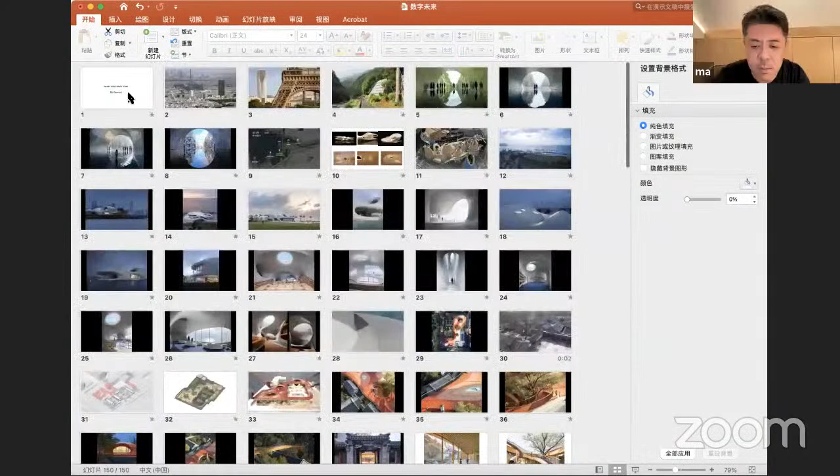The title is Insert New Space-Time. I think we're talking about the future by talking about technology, and the future also starts from imagination, what we believe in the future. So time and space are also quite important. Architecture is physical material and space and technology, but architecture also forms space, atmosphere, and even a strong context to influence how people behave and react to such space. So I think architecture is creating space and time.

So I will start from one very interesting competition we entered a couple years ago. You can recognize this image is the city of Paris, and you see the Eiffel Tower and another dark colored tower to the right. The name of it is Tour Montparnasse, and it's very big, right? It looks very heavy, and the Paris people don't like it. So they held this competition to redesign the facade of this building. And we submitted a proposal like this.

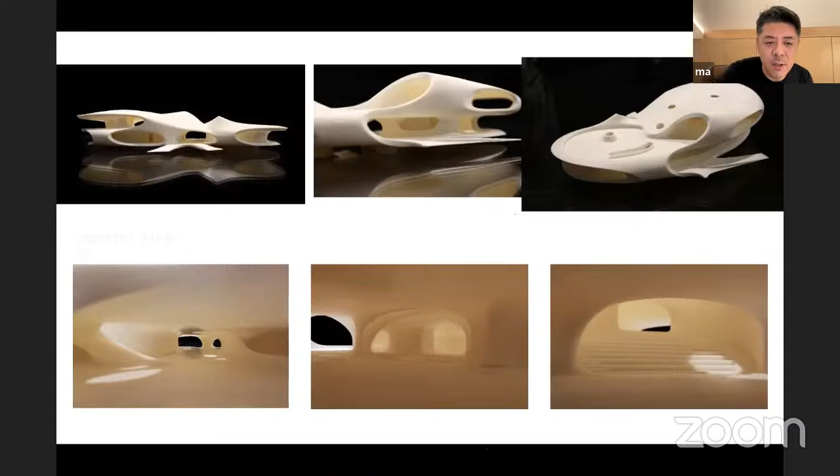So this is the model of the architecture, and we create a space full of holes. We call this the Cloudscape Library - it feels like a floating cloud, but inside you find the negative space. Inside is actually a library, a toilet, a shower, serving the people who are doing sports. That's the model, and that's how we built it.

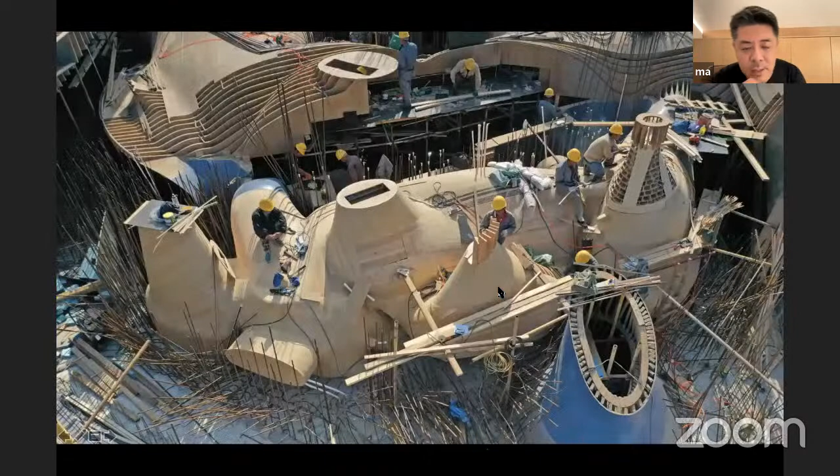Because the model was quite complex, we wanted to make this all continuous, cave-like space out of concrete. So we made this wood mold, which looked like a sculpture already, and then we cast the whole concrete building. And that's when the building was completed - it looked the same as the model, right?

It's all concrete - it has a material, but by using this concrete material, all the space and the walls and the structural elements are all mixed into one complete geometry. You don't see isolated building elements. So why are we doing this? Because the space is more important in this case - you see the holes as entrance, as window, as corridor, and as a light well.

So you enter the space and you want to explore the complexity of it. For example, this is like an entrance space, and you see a coffee shop, you see this second floor terrace. People walk into the building like this - everything is continuous.

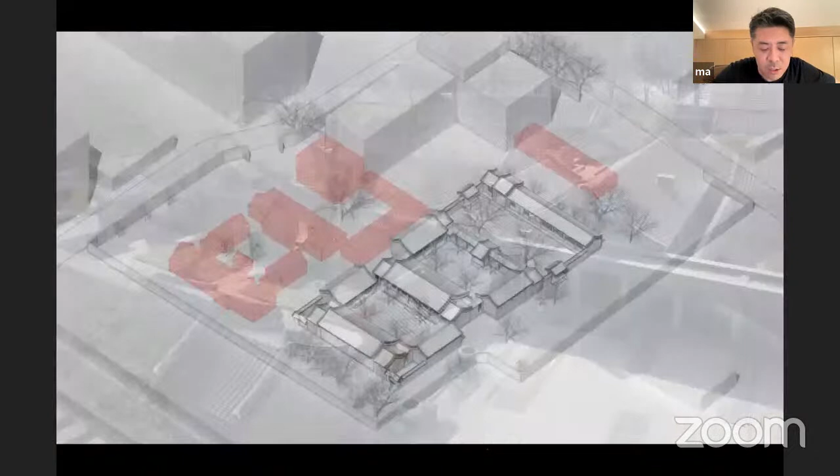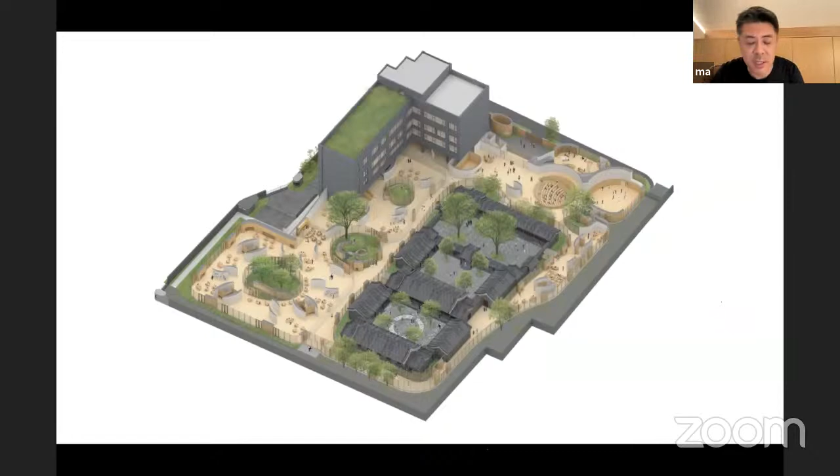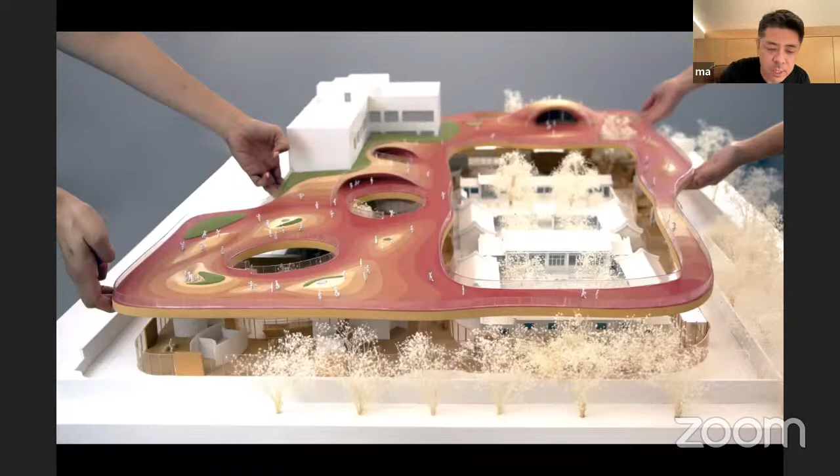So basically all these red buildings we decided to demolish at the beginning because they're fake old buildings. After that, we wanted to use the whole site to make one floor building, including a courtyard inside, including classrooms, because we want to keep the new building very low. So when you're in the old courtyard house, you don't see the new buildings because it's low - they're both single floor. And the roof, of course, is very big, and we want to take the roof as an open space, like for kids to have an outdoor class.

So here is one building completed - we have old and we have new. The new architecture is very different, it has its own character, nothing similar to the old building. The color is different, the structure and the shape - they look a little bit contrasting.

So when you are on the red roof looking at the old building, it feels like you're standing on Mars looking at the Earth. It's a little bit because the courtyard house, the old traditional building, is so familiar - everyone's familiar with it. When you see that, you imagine a special period of time, and the architecture reflects that time. But when you're standing on the roof like this, you feel this is new - you don't know where it comes from.

And then we have a courtyard, we have a room, classrooms like this. That's why we're doing the courtyard - of course we have trees we need to preserve, but also we need a courtyard to bring natural light and wind, the ventilation, to our building. So later I found this typology of architecture is quite consistent with the old traditional building - although it's all new, it's all about internal space and nature.

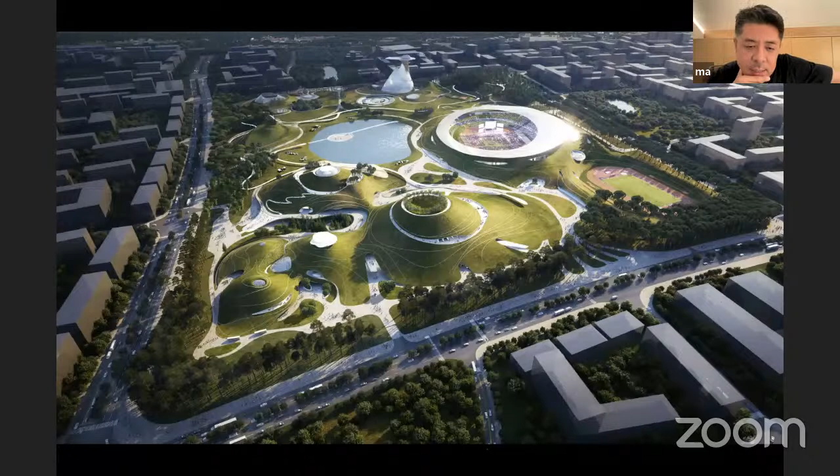And this is another project. It's bigger, a little bit like a park, but it's actually several large-scale stadiums. Normally in each city they build stadiums and swimming pools, all this public sports facility. But in this case we covered all this building into green mountains, and those green mountains look like volcanoes in those renderings. This building is under construction right now, and one of them is already completed.

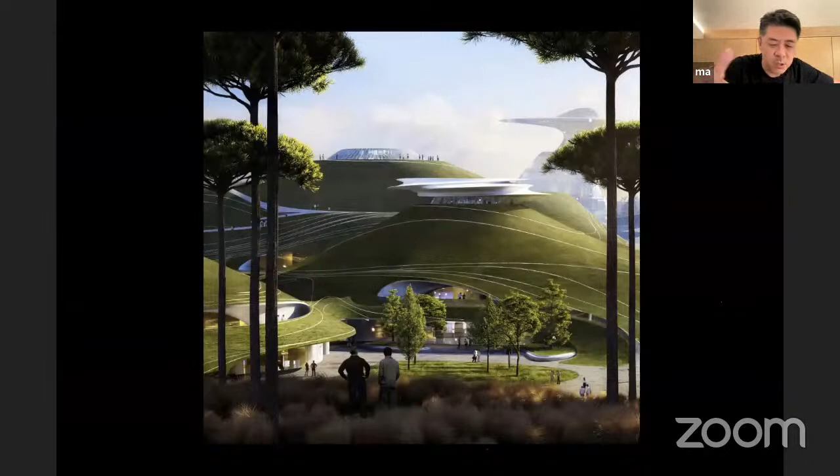So you see, we take all this building as landscape elements, and people can actually walk on the facade, and they can climb all this building. They can reach the rooftop of the volcanoes. So the architecture as a material disappeared. Instead, you will have this land art public park in the city, and everyone can enter and enjoy it.

And this big stadium is disappearing as well. Why are we doing this? Because we thought all these big buildings are showing the muscle in all the cities, because sports normally we understand as a competition, and everything actually in the city is also about competition. The buildings, high rise, people fighting for all this, everything.

So we need a space to relax and feel that people can enjoy the nature and maybe observe the sky or something, a flower or stone. So I think nature is more open to everyone.

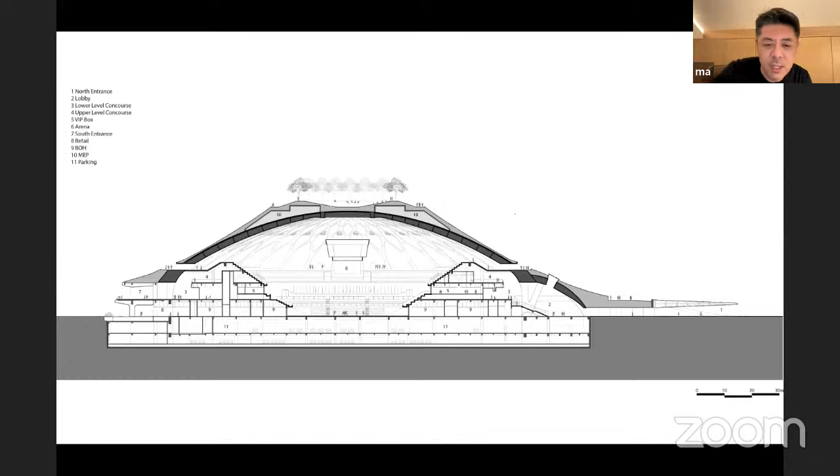But inside the mountain, it has to be a building, because that's the whole project about. And so they see this, we have to build like this. So inside we have rooms and seatings and venues, and this is a sports venue for basketball, but it's a very large span structure. But on the top of it, you have to allow people to access, and also we need to put trees on the mountains, so it's quite challenging for such a structure.

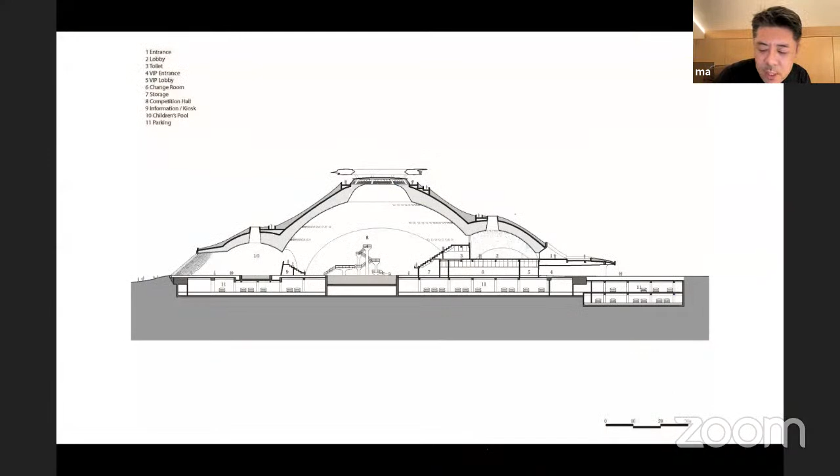This is another mountain, inside is a swimming pool, and we also have a different space and structure system, so that you can have a different program in those mountains. And then you need ventilation, you need natural light as well, so it's a building as a space. But outside, we build a building first, and then we build a landscape.

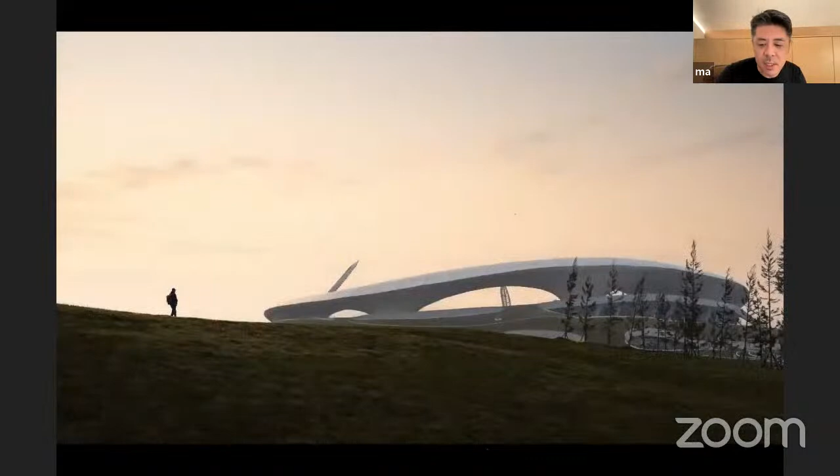This construction site, and this is a stadium already completed. And you see that all this landscape actually becomes part of the facade of the building. Underneath is a program, is a road, is all the functions, but people can freely walk everywhere. They can enter the stadium from all directions. Actually it's a little bit hard to manage a building like this, but you can really find the freedom in such a space.

And that's a parking structure also underneath the building, and it's all the landscaping, right? So it's nature, it's artificial nature landscape, but it's also different from the normal park, because it's a combination of nature and architecture. So I would say it's more close to land art.

So we want to use the space for everyone, for the public to enter such space - families, kids, dogs - so they can go in there and enjoy the freedom of observing other people, observing nature, observing sky, and maybe rethink the relationship of themselves and the society. So those are images of it.

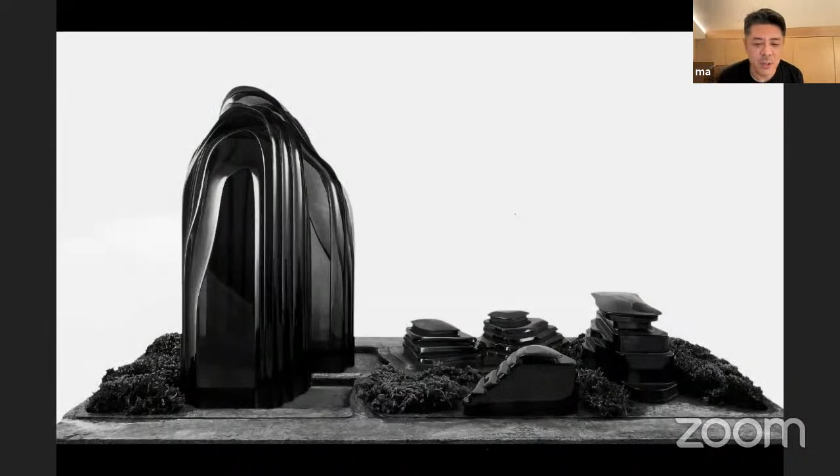And this is a tower, right? This architecture model actually looks like a classic Chinese bonsai. It's a small model, you can put it on the table, and then we transform this into a real building. Of course it's larger, but it's interesting - this model looks classic, but when you put it as architecture in the city, it looks futuristic.

Some people call it inserting into a normal city, because the building is special. It's a dark color, it has curves representing maybe the nature, the mountain, and those elements you can normally find in nature, but not in the city. So in this image, the building is talking to the park in front of it and the trees, but not talking much to the surrounding buildings.

But inside this development, we also create Green Valley as an open public space, so everyone can go in there and enjoy the nature. And that's what you see from the street.

It's quite alien, I would say. When the building becomes large and so black and so different from the surrounding buildings, it has some atmosphere that draws everyone out of the reality. It has that power, I feel. So, but I find that's interesting, that we draw people out of reality, but where do people go.

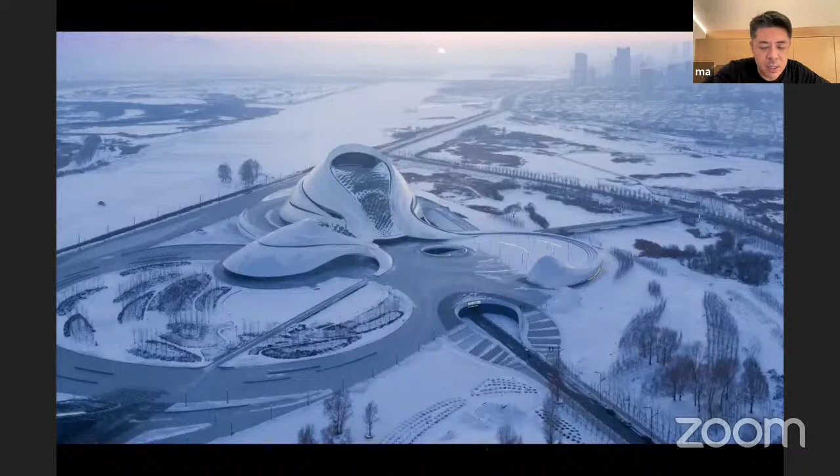So you can see all these buildings are trying to become the landscape, the trees lining the landscape. And the building is merging to the horizon because the building is not an object. It's more like it tends to continue to the horizon, to the ground.

So the people can actually walk onto the facade. They can climb the building. They can walk around the building from the exterior. So when the building is closed, there's no show or opera, so people can still interact with the building, and they can come all the way to the roof and reach a space like this. It's an amphitheater, and you can also observe the surroundings, also the sky.

So the building is very low, and they're trying to become horizontal, right? It becomes easy to approach, so to give you that feeling, and that shows the ramp on the facade.

And the night view, you see the building is very transparent and open. During the daytime, there's a lot of natural light coming in, and you see the wood object as an auditorium. So the interior also feels like an exterior, and the staircase becomes a performing space for the audience. And like when they walk on this, they see each other. You know, they're ready for the drama.

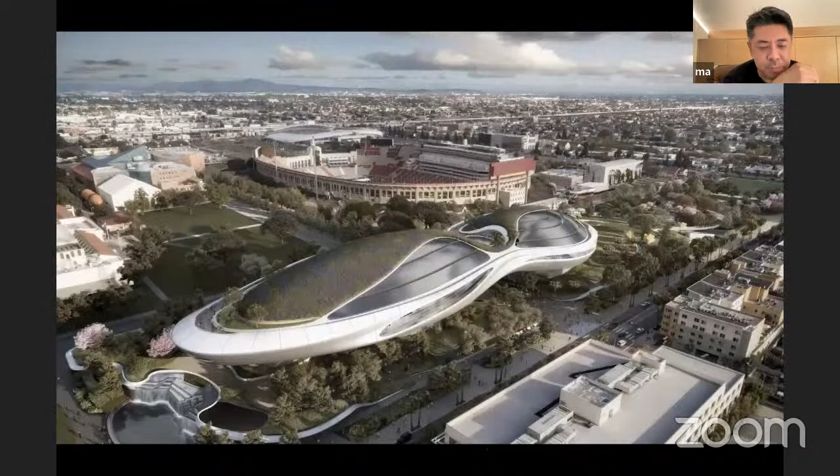The building is a little bit like a floating structure, right? A little bit like a cloud. And this is some surrounding environment. We float the building so that we can have a public space and landscape on the ground level, shaded by this building. At the same time, we create another roof garden on the upper part. So there's two layers of public space.

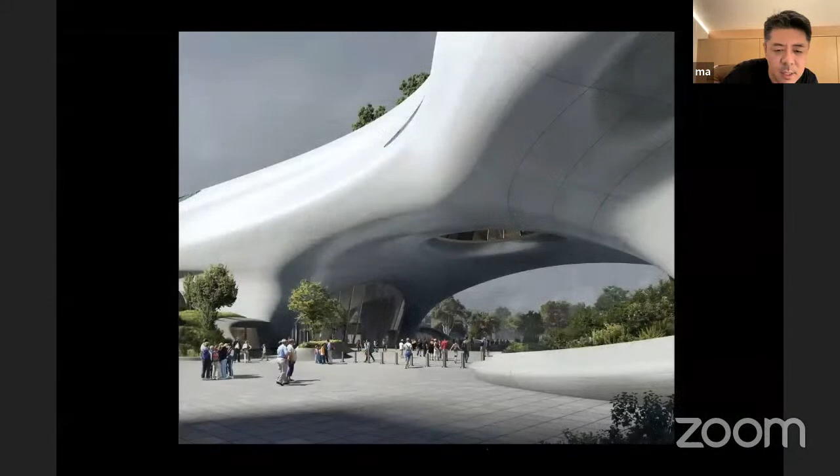The building also serves as a gateway into Exposition Park, because there are several other museums here. So our building has the park entrance underneath. It becomes a gate, and above it we have the building and exhibition space floating above. This is a construction image, and this is the entrance, the lobby, and the gateway.

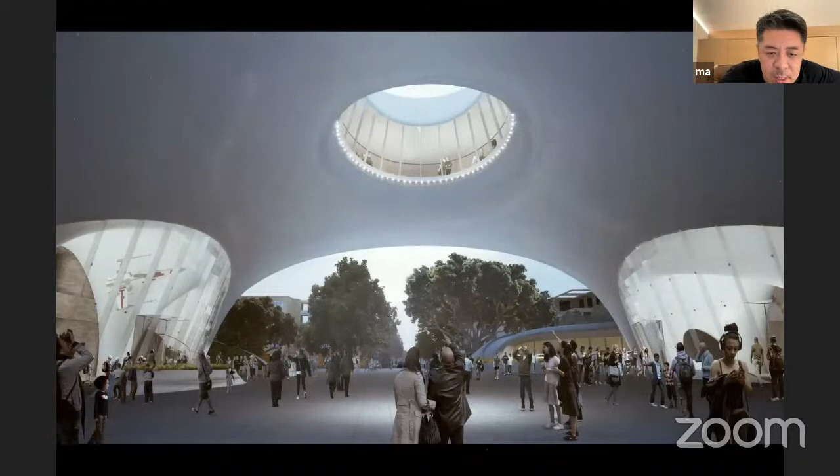Here you see the sky, the lobby to the museum and the lobby to the education part of the museum. It's an open space, a public space. Everyone can access here, and it's shaded. It's quite necessary in Los Angeles. And then when you enter the lobby, you take elevators, and then you rise up to the exhibition. So lifting is a key word.

Why does the building look like a cloud? Because a cloud is up there in the sky, it's floating, and it feels mysterious, making people curious about what's inside, right? I think it's also important for a cultural building that people need to be curious about the content inside, and they should be ready to explore it. Architecture is part of this journey. Architecture should make people wonder and feel ready for what's next.

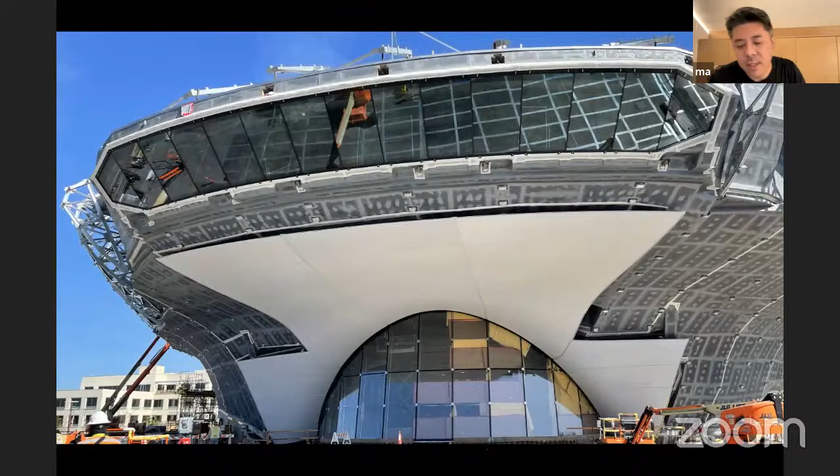And that's the landscape and architecture floating above. Those are some construction photos underway. I think next year the museum will be completed.

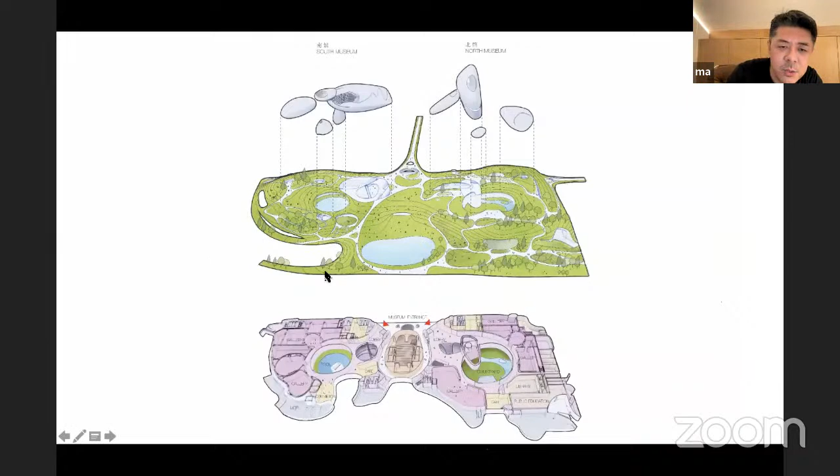It's a museum in Shenzhen. The green part is also part of the museum because there is a huge program, 100,000 square meters. So the most function, we put it in the landscape so that the roof of the exhibition space can still be public green park. Inside this park, we will have several special rooms inside those stone-shaped buildings for exhibition. That's the layout, basically very simple: a building underneath, a courtyard, the landscape as a roof, and then several special buildings.

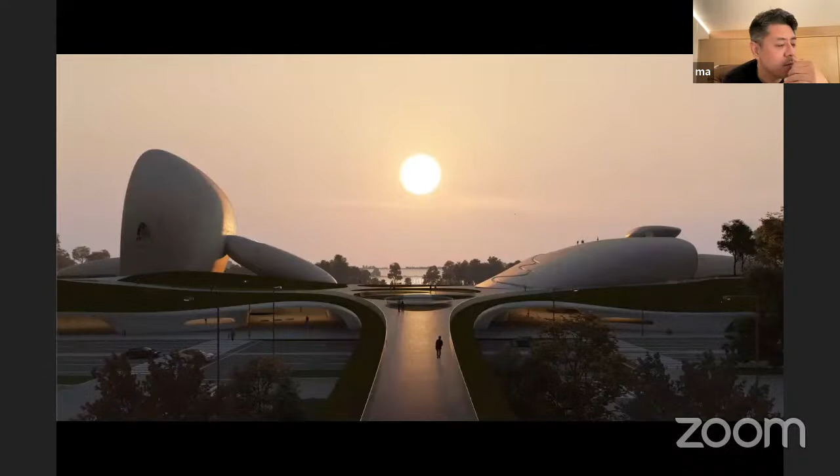So here's an interesting image like this, when you look at it without background. You feel the stone, and this image is quite classic, quite ancient even, as if it could be felt from billions of years ago. The stone, the ocean, the sunshine, they're always there, always been there.

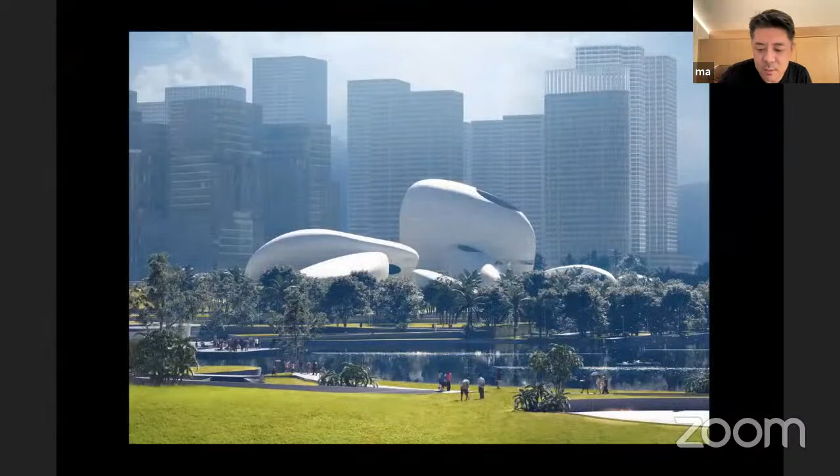The city is so temporary. The modern city, the modern image, glass buildings, all the technology, feels temporary, short term. So it's interesting that architecture or public space could enlarge the feeling of the moment. Everyone lives in the moment, but we can enlarge such a moment, and then the imagination might start from that moment. So here you see the background, the building.

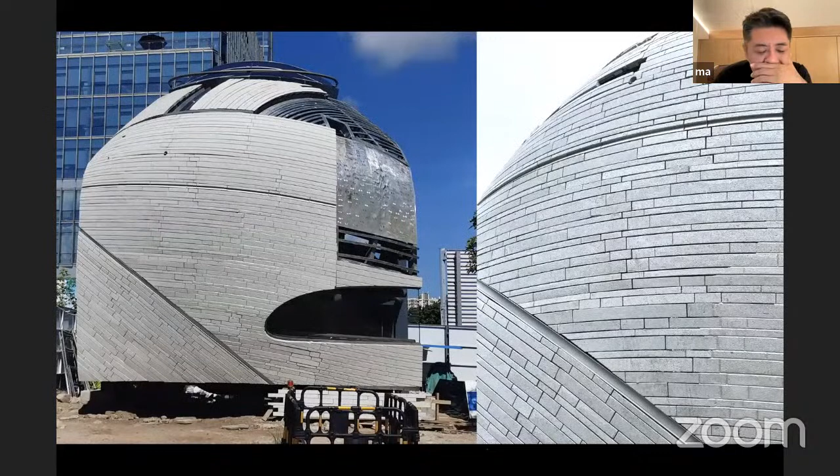And now we're testing the facade material, trying to use natural granite, natural stone to make a curved building. It's quite difficult, but since we consider this building as a device to talk to ancient time, I think it's necessary to make the technology a little bit timeless.

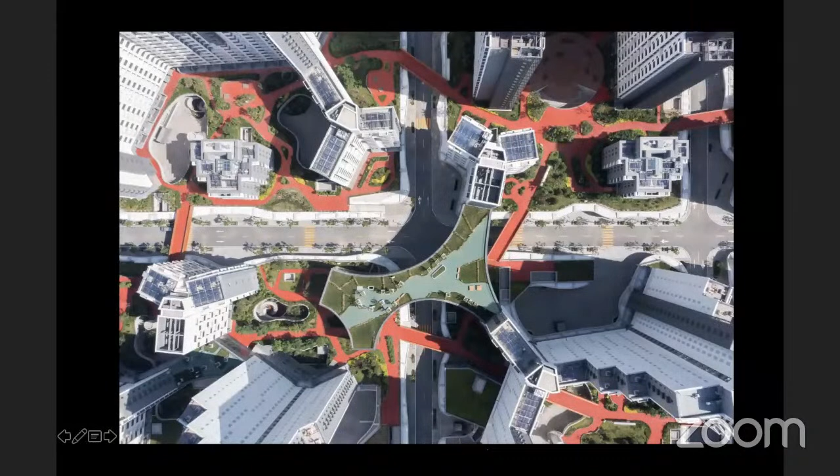Actually, we build a neighborhood instead of buildings. So here, that's why the streets here are internal. We try to make the community open, so the street could connect to the urban street.

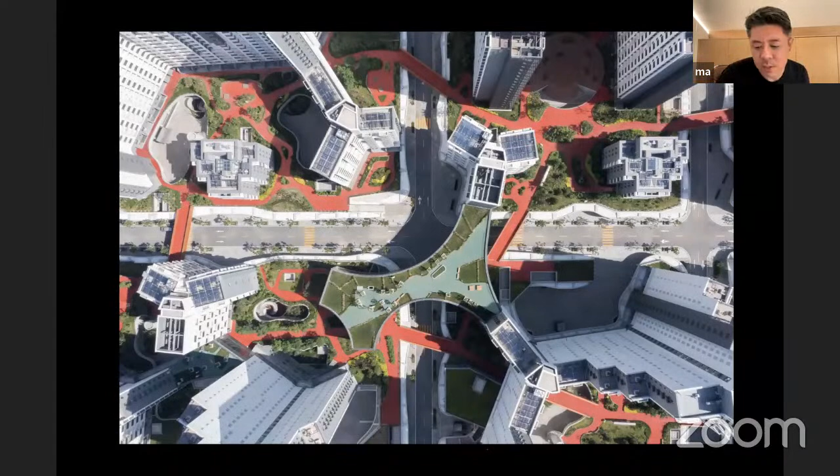So this is social housing, right? Low-income people live here. I think it's necessary to link this community to the larger society, so they're not closed off like a prison. So we create the street on the ground level to make the commercial active on the ground level, and the second level become more like private residence-only space.

So here you see this vertical community with the street on the ground level, and the gardens and public nature on the second level, and public facilities above, and the houses even on the upper level.

You can see, I want to put this at the last of this presentation, because I want to show that for us, building shapes and technology are very flexible for different projects. In such a social project like this, I think it's important to achieve the social relationship, social values in such community by using very low resources, like low cost and easy construction. So here you can see the park and the public space on both levels.